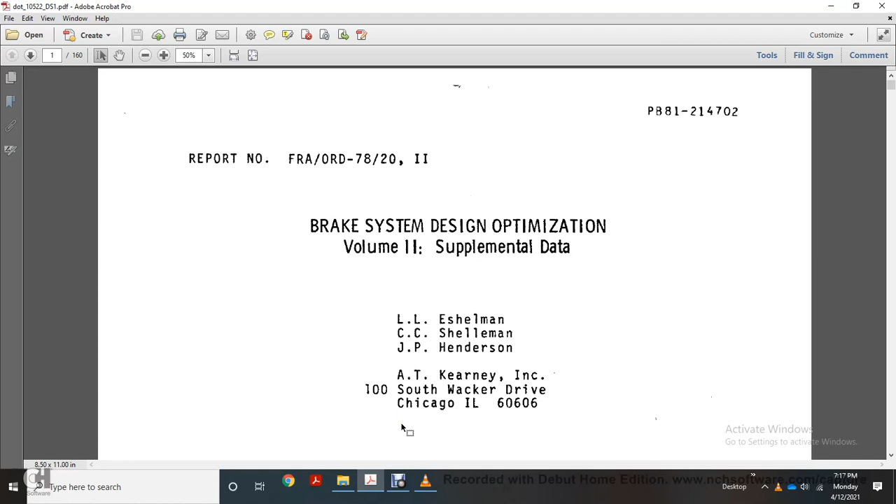The report number for FRA/ORD-78/20, Brake System Design Optimization Volume 2, Supplemental Data, April 1981 final report, documented.

This document is disseminated under the sponsorship of the U.S. Department of Transportation in the interest of information exchange. The U.S. government assumes no liability for the contents or use thereof. The U.S. government does not endorse products or manufacturers; trade and manufacturers' names appear here solely because they are considered essential to the objective of this report.

Brake System Design Optimization Volume 2, FRA/ORD-78/20, date April 19th, 1981. Performing Organization Document DOT-TSC-FRA-78-1, II. AT Kearney Incorporated, 100 South Wacker Drive.

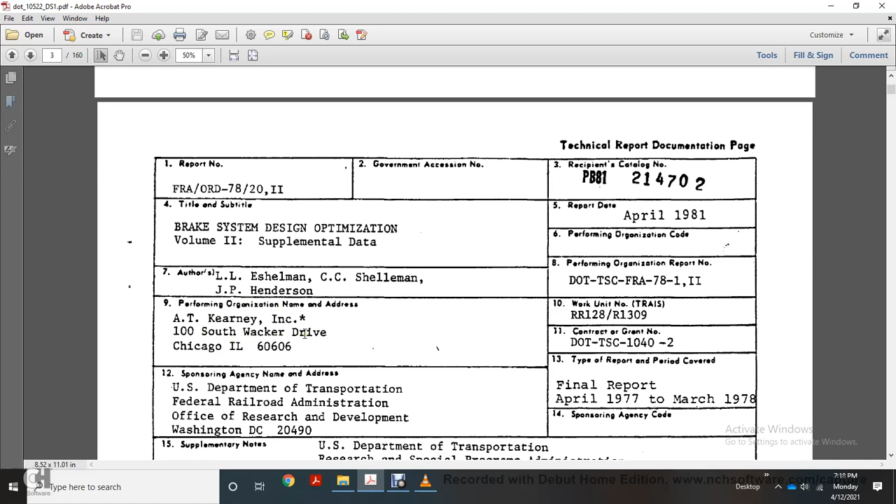Preface: the work described in this report was carried out under the direction of the Transportation Systems Center under the Department of Transportation, for the context of the overall project for the Federal Railroad Administration to provide the technical base for the improvement of rail transportation service efficiency, productivity, and safety. The work is sponsored under the terms of the FRA Office of Research and Development and the Office of Freight Systems.

The final report is organized in two volumes. Volume 1 describes the work performed and presents the results of the study as a complete report. Volume 2 contains supporting material developed in the course of the study, which adds substantially to the information base but is not essential to the objective of the study.

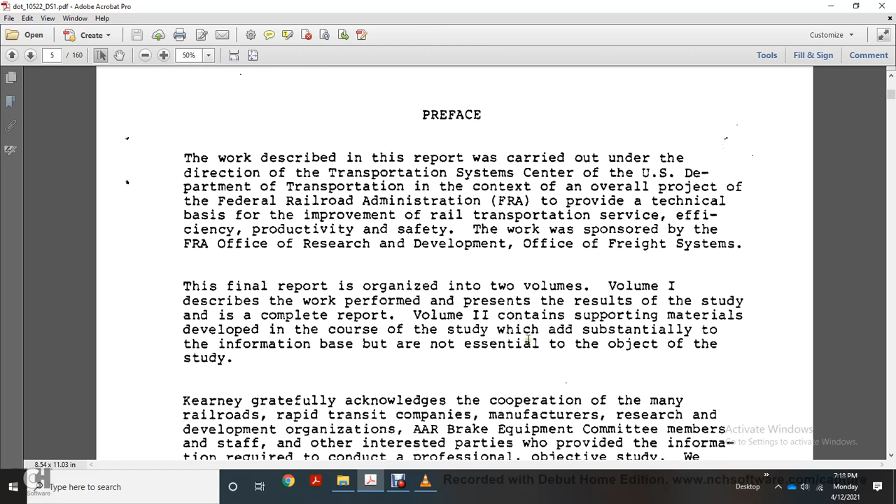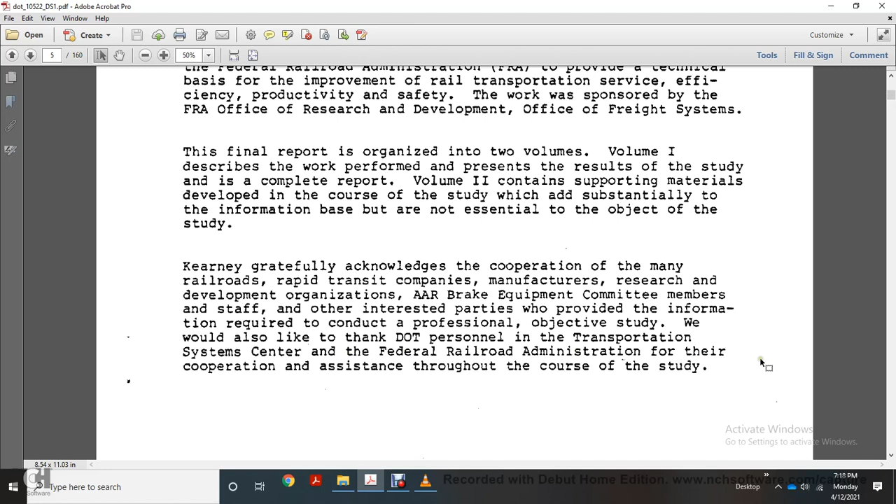Kearney gratefully acknowledges the cooperation of many railroads, the Rapid Transit Company, manufacturer research and development organizations, AAR Brake Equipment Committee members, and the staff of other interested parties who provided the information required for the conduct of this objective study. We would also like to thank the personnel of the Transportation Systems Center and the Federal Railroad Administration for their cooperation and assistance throughout the course of this study.

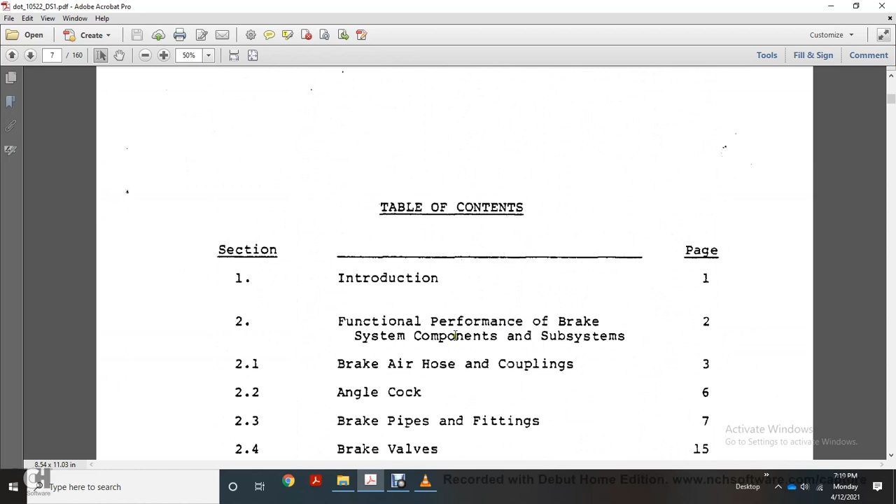Section 1, Introduction. Functional Performance Brake System Components and Subsystems: Brake Air Hose Couplings, Angle Cock, Brake Pipe Fittings, Brake Valves, Air Reservoir, Brake Cylinder Release Valve, Brake Retaining Valve, Brake Rigging, Hand Brake, Slack Adjuster, Brake Shoe.

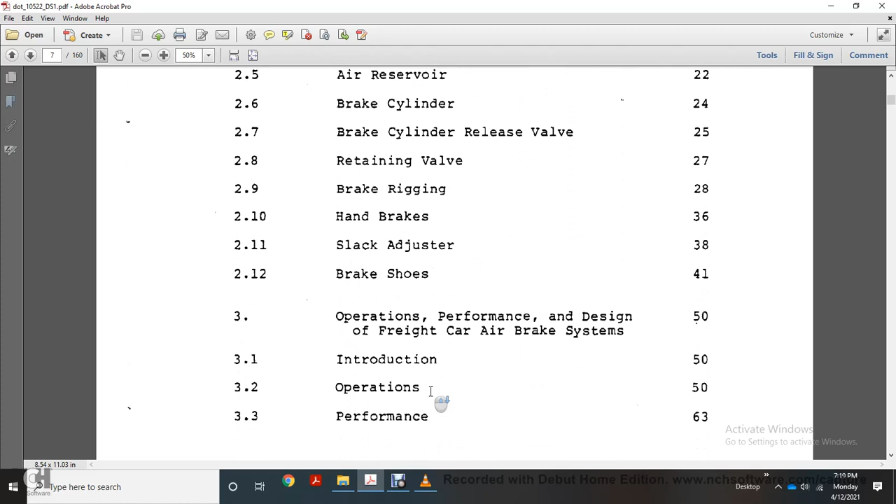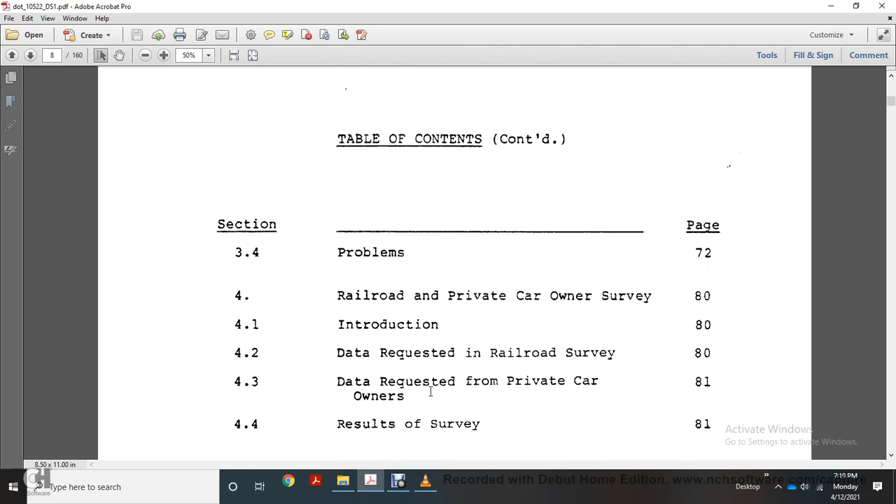Section 3, Operating Performance Design, Freight Car Air Brake System: Introduction, Operating Performance, and Problems. Section 4, Railroad and Private Car Owner Survey: Introduction, Data Requested from Railroad Survey, Data Requested from Private Owners, Results of Survey. Section 5, the thermal capacity of freight car wheels.

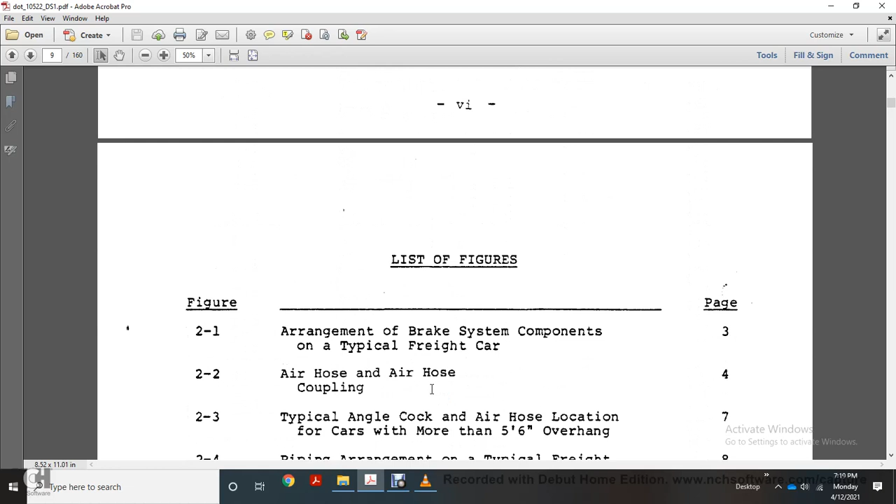Introduction, parameters considered, and summary. Appendix A, glossary of terms. Appendix B, reference and bibliography. List of figures and list of tables.

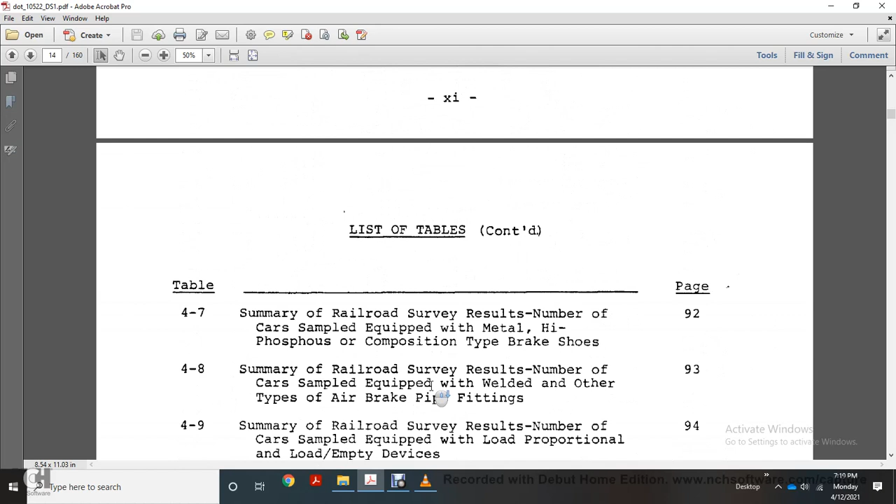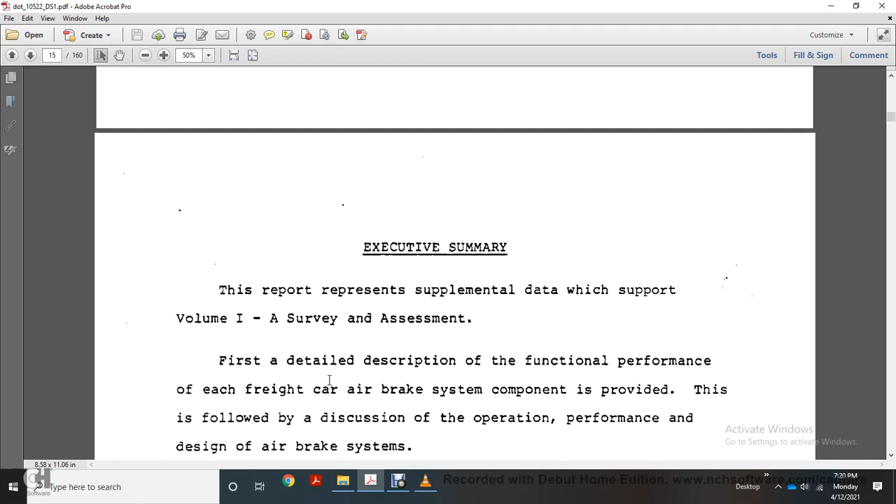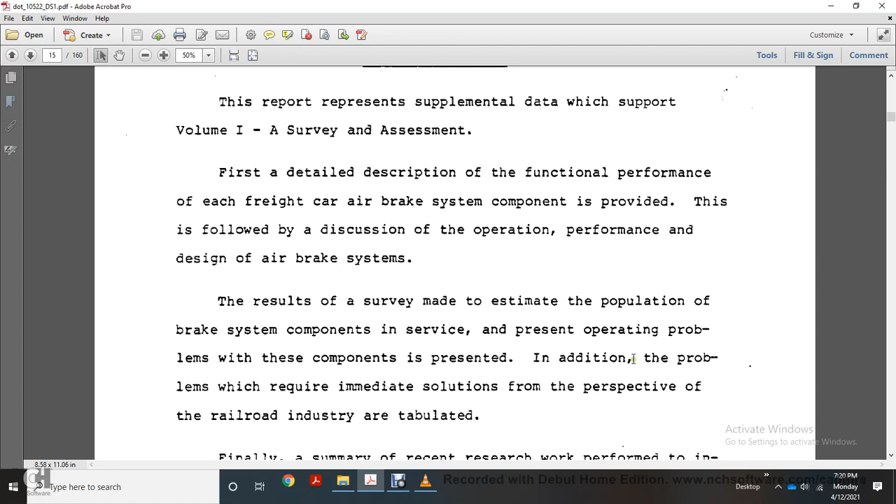Executive summary. The report represents the supplemental data in support of the Volume 1 survey and assessment, with detailed descriptions of the functional performance of each freight car air brake system component, along with a discussion of the operation, performance, and design of the air brake system. Results of the survey, made to estimate the population of brake system components, present the current operating problems of the components, presenting in addition the problems which require immediate solutions from the perspective of the railroad industry, tabulated. Finally, a summary of recent research work performed to investigate freight car wheel thermal capacity is presented.

1. Introduction. The volume represents supplemental data and information in support of material presented in Volume 1, A Survey and Assessment. The volume includes 4 sections followed by 2 appendices; the content of the sections which follow are as described.

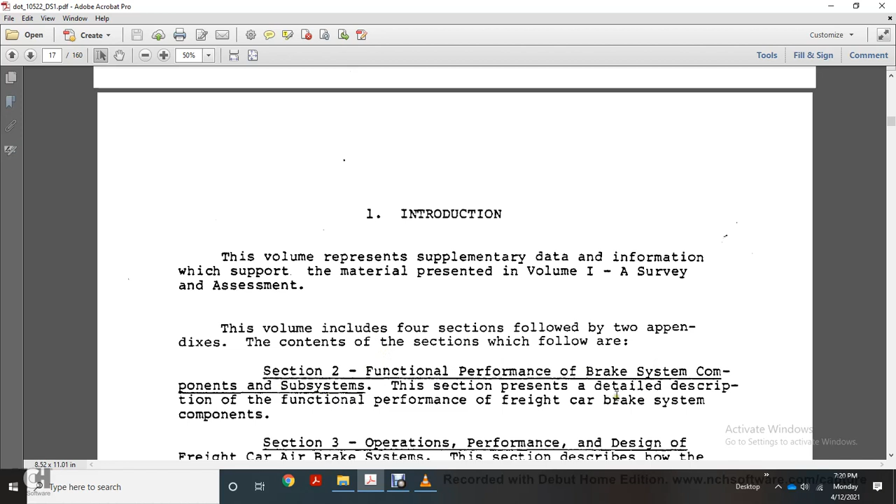Section 2, functional performance of the brake system components and subsystems, presents a detailed description of the functional performance of freight car brake systems. Section 3, operations, performance, and design for the freight car air brake system, describes how the various brake system components interact within the system and delineates the operating problems presently associated with each.

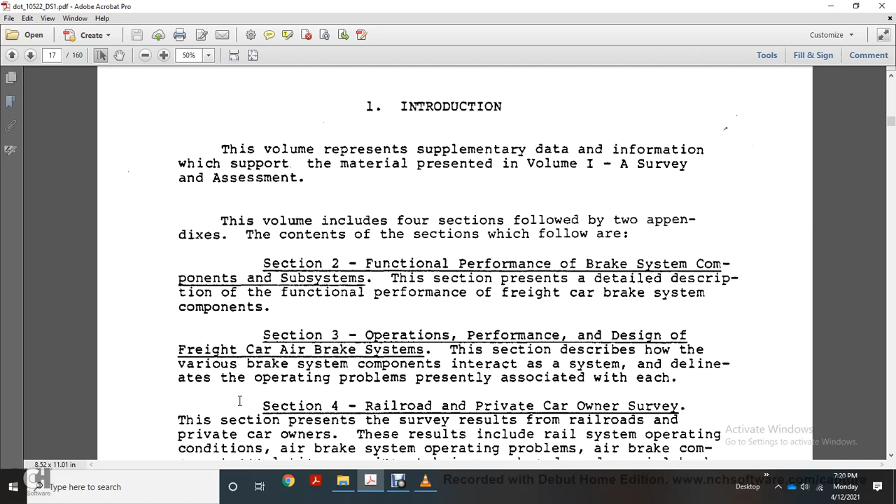Section 4, Railroad and Private Car Owner Survey, presents survey results from railroads and private car owners. The results include rail system operating conditions, air brake system operating problems, air brake component populations, equipment being purchased, and special brake system equipment in service.

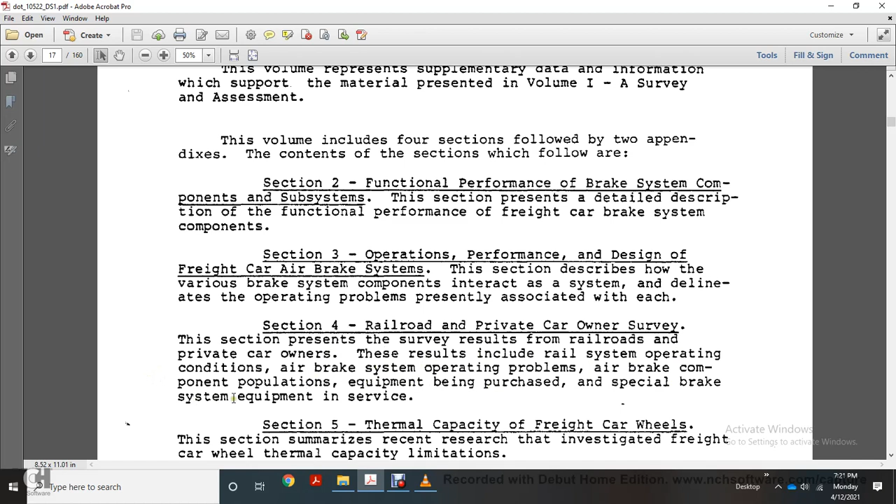Section 5, thermal capacity of freight car wheels, summarizes recent research to investigate freight car wheel thermal capacity limitations. Two appendices are also included: Appendix A, a glossary of terms representative of the terminology technically used in the air brake railroad industry; and Appendix B, reference and bibliography, presenting documentation material used in this study.

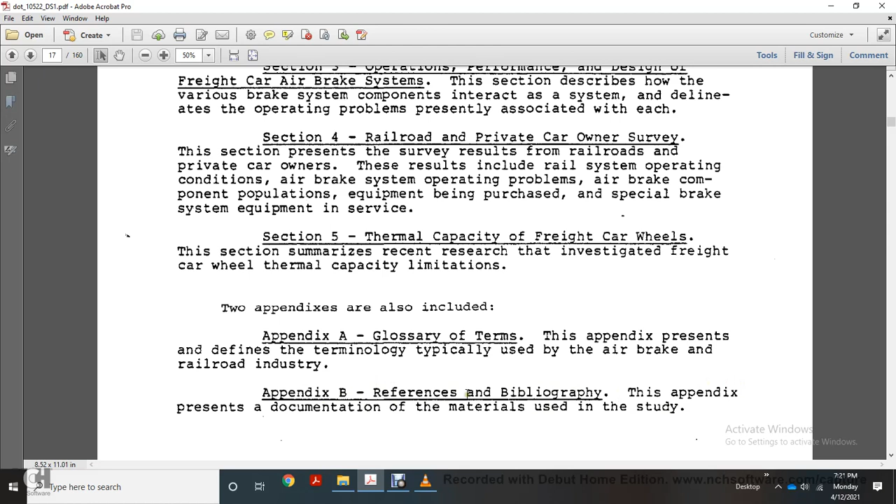Chapter 2, Functional Performance Brake System Components. And we're going to cut the tape there.